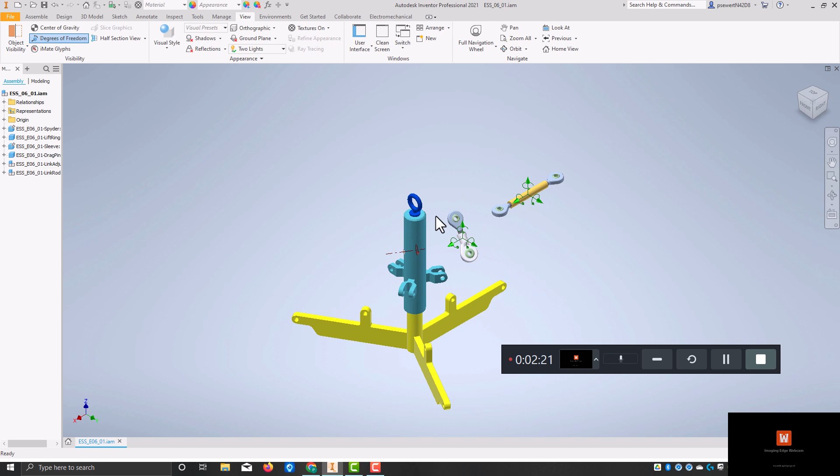All right, so I'm going to turn on the degrees of freedom. I'm going to go up here to the word view, and I'm going to click on that, and then in the visibility tab there is degrees of freedom right there, and you can see that it has added degrees of freedom to in particular these two turnbuckles, a small one and this larger one. This guy does not have any degrees of freedom on it, except for this rotational one right here. And the reason for that is because I grounded it. When I unground it, the degrees of freedom will return with that.

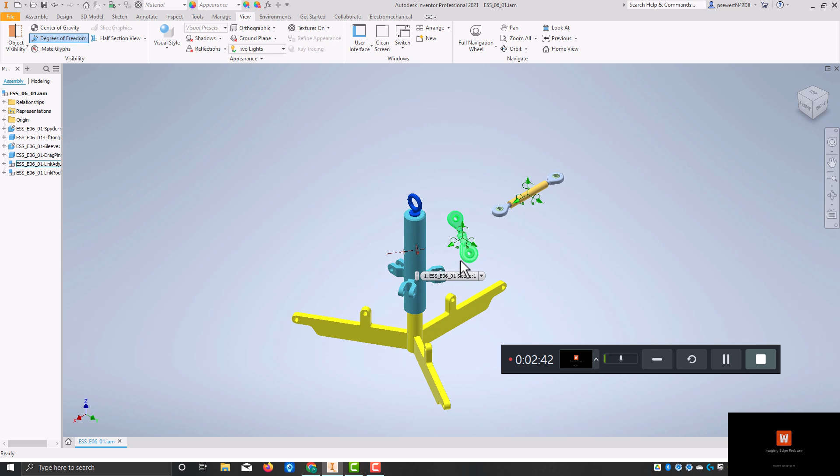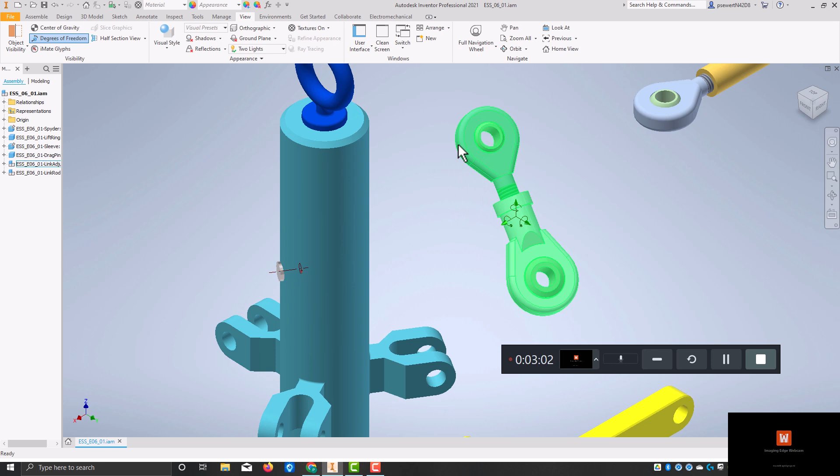Okay, so I'm going to zoom in here a little bit so that I can see the top of this buckle and also this arm bracket. I'll call it that this time around. I'll probably change the name on that a few times. I'm going to bring this buckle closer to the arm that's coming off the edge of this thing, and I just clicked on it and dragged it down. Okay, now I'll tell you right now that if you have a hole that's been created in something, it has an axis running through it, even though that axis isn't visible.

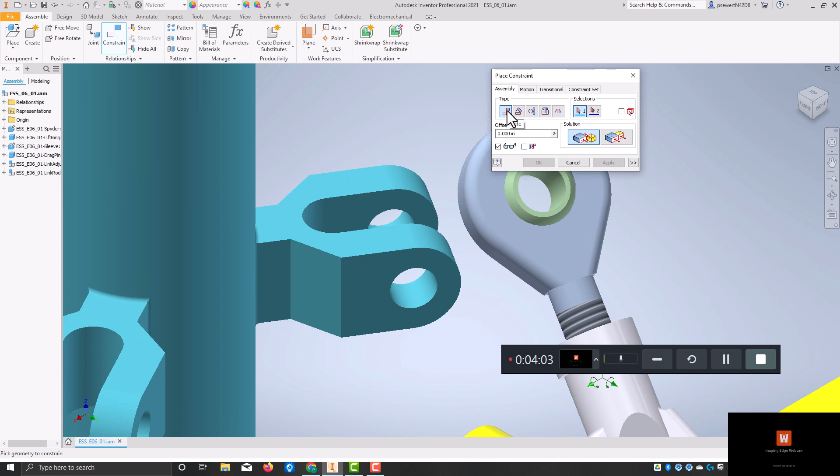So I'm going to go back to assembly right here, and I'm going to click on the constrain tool, and there are multiple different constrain tools here. We have mate, we have angle, this one is for tangency, this is for insert, and this is for symmetry. Honestly, I have never used the symmetry one. Probably there were opportunities that I should have used it, but I didn't. So right now we're going to do this mate constraint. So I'm going to click on that.

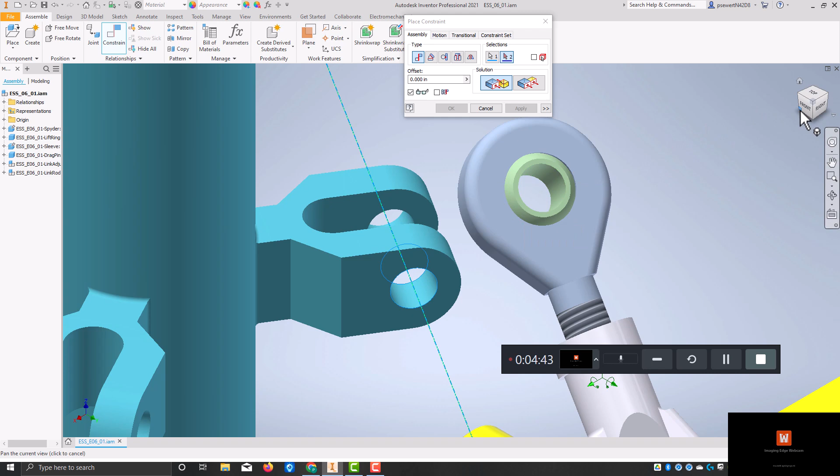Now it doesn't matter which one of these two things you do the following step to, it'll work the same either way. The inside of these holes, I'm going to just put my cursor on one of them, and you're going to see a center line appear here. Okay, and I'm just going to click on that. I'm going to go up to this guy, and the same thing is going to happen when I touch the center of this one. Oops, that's not what I want. This is what I want. I'm just going to go to the cube and spin this a little bit so that when I touch this one, you can see that the center line appeared.

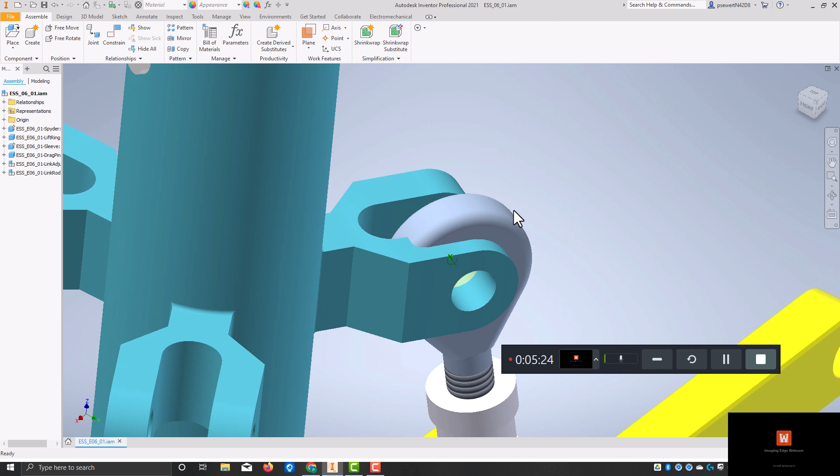And it just popped into this arm tab. And I don't think I have to do anything else because I want to make sure just that this middle box is lit, and it automatically was for me. You may have to click that align button. I'm going to hit apply. Okay. Now I'll cancel this. You don't have to cancel it, but I want to show you something. I'll orbit this around so that I can see it.

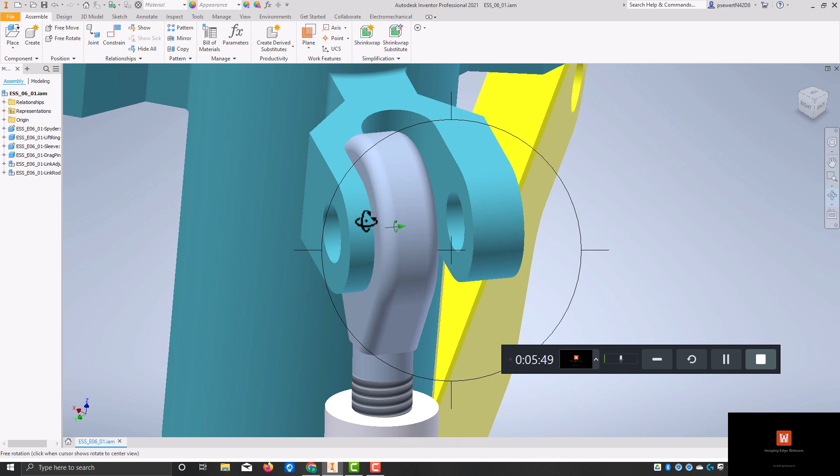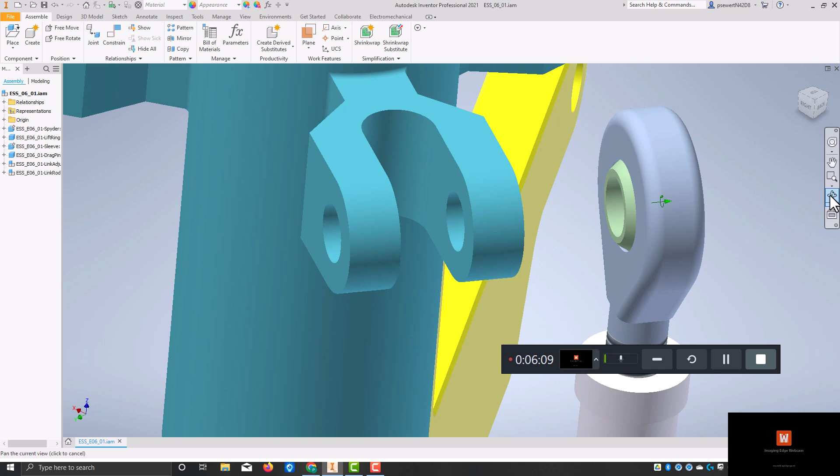And right now, what this is going to show me is that this part of this little connector and sleeve, this is the connector and the sleeve is down here on the bottom, is interfering in the middle of this. So I'm going to hit escape a couple times, and I'm going to click, and I'm just going to pull this off to the right. You can pull it to the right, you can pull it to the left. Okay. Now the center lines are keeping these two things lined up. So we're going to use the rotate tool here a couple times. So I'm going to just zoom out with that.

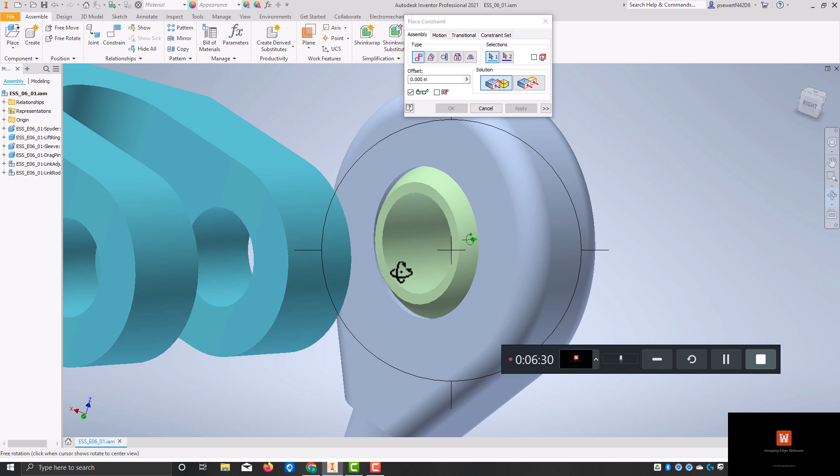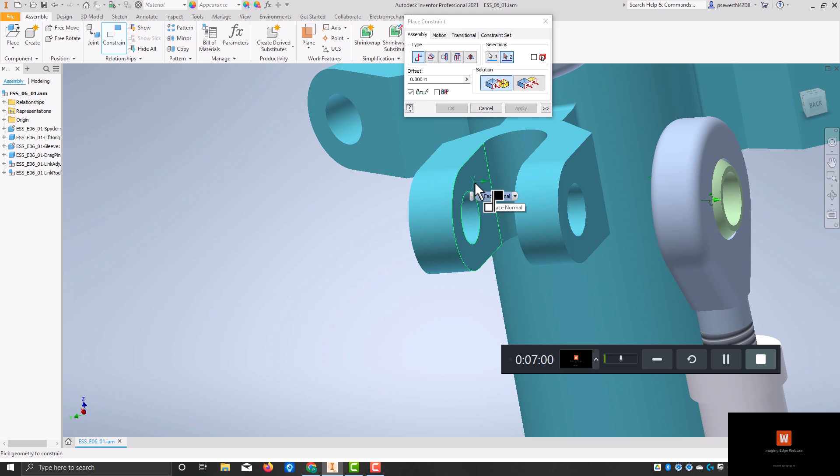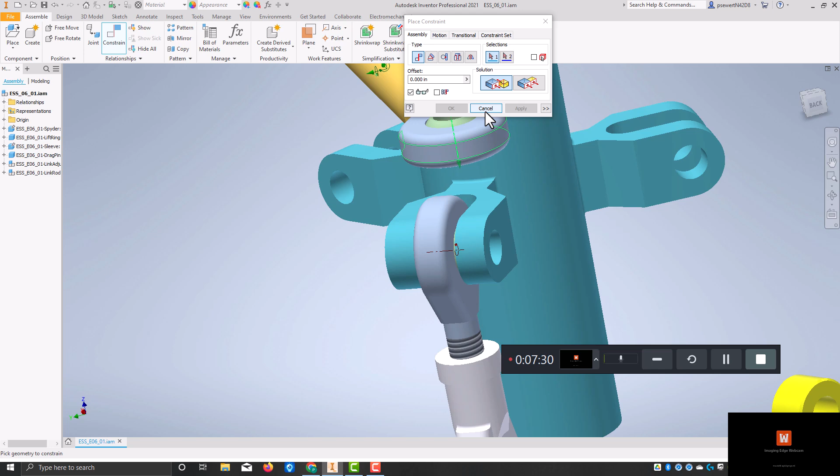Now if you take a look at the degrees of freedom, you're going to see that 2 out of the 3 of them have disappeared. The third one is right here, and that's a rotational one, which we're going to leave alone. So I'm just going to cancel this for right now, okay? And then I'll go back to my isometric view. Actually, the house is the isometric view. So there we go. So that's the first part of putting this thing together.